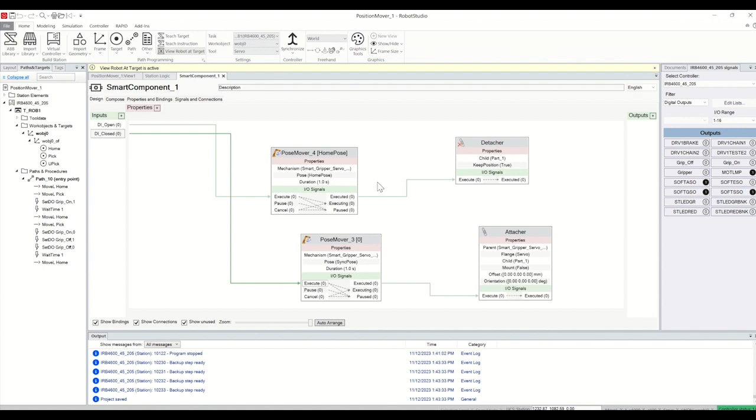I didn't use smart components before, but this time I'm going to use the PoseMover and do a similar thing. That is what I am targeting to do. If I just play it, we will see the robot come, pick, go there, place, and go back to the home position. So let's see how we can create the whole simulation in this video.

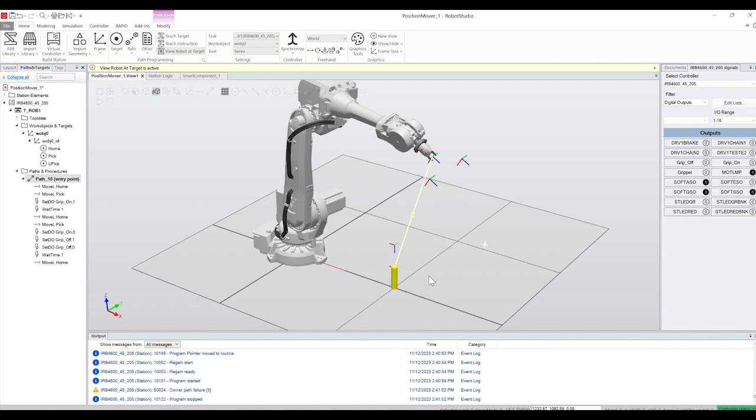To do this, I'm going to use IRB 4600_45_205. I'm using this one because the project is related to that robot, and I thought, why don't I use the same robot so that we can have some practice. This time I'm going to use a smart gripper. So let's put the gripper at the tip of the robot.

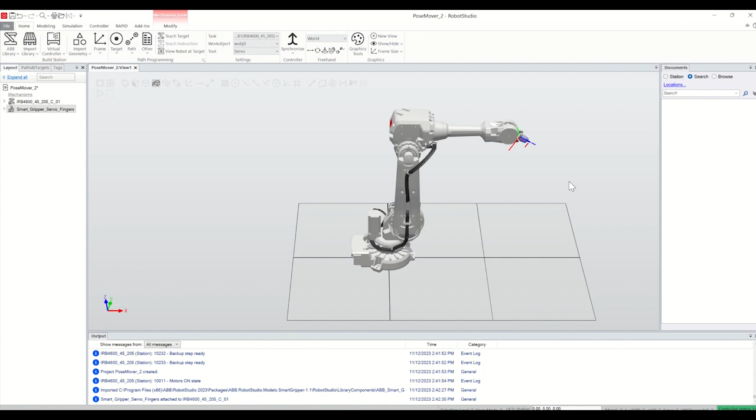As a picking object, I'm going to make a cylinder from the model. The radius will be 20, and the height 200. I'll make it at 0 0 position, then quickly move the position along the x-axis, maybe 1000, so that I know the object is here. And let's give it a color, maybe yellow or green. So we got the object.

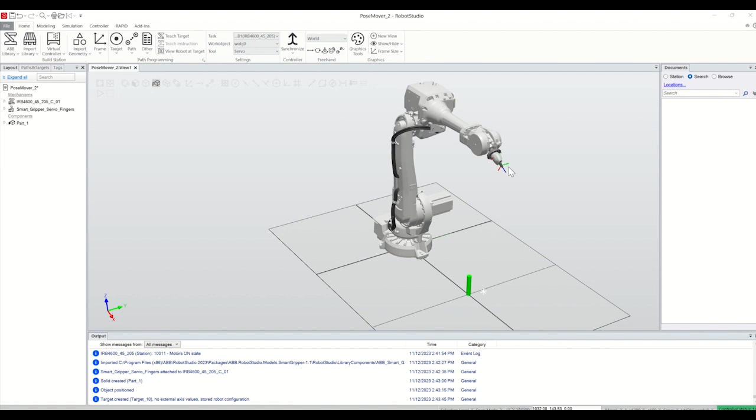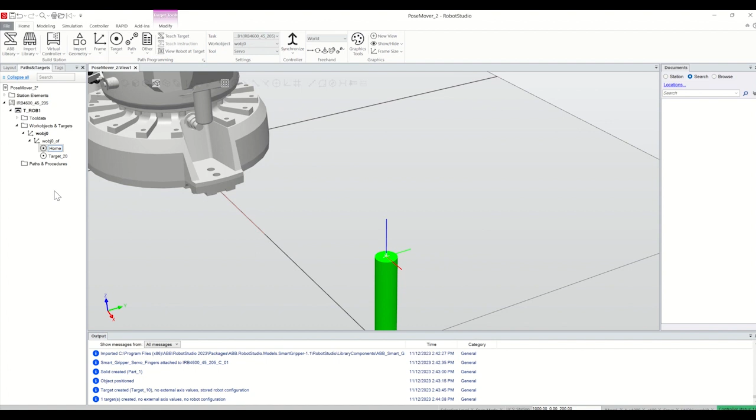Now the next step is to quickly make the targets for home and pick. I want to make one TCP, so let's take a teach target. I got one target in front, and let's make another one close to the top of the object. I want to make sure I'm selecting a grid and on top, then I can create one. Let's make this one home, and the other one my pick position. I know I would need to change the pick position.

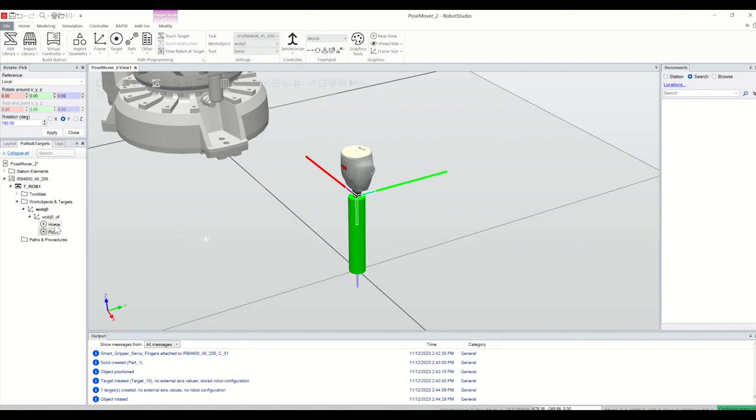I usually do 180 degrees along Y, and if needed, I can change others. If I want to see how it looks, it looks like this, and I can also bring the robot there. Then I want to make the toolpath and see if the robot moves from the home position to the pick position. I am seeing a preview of the tool path. Let's see if I can move along the path. It looks like the robot is moving along the path.

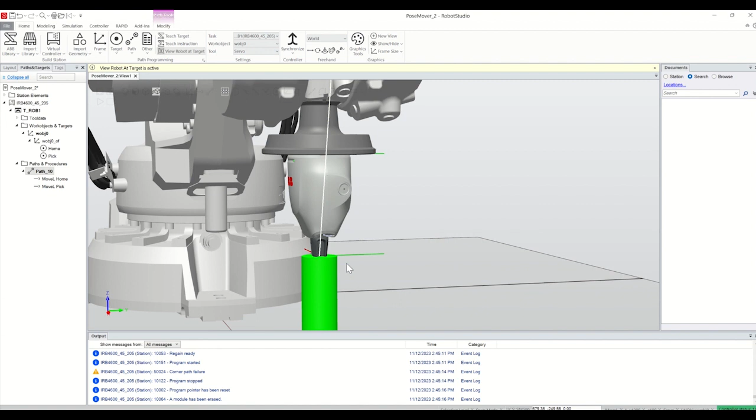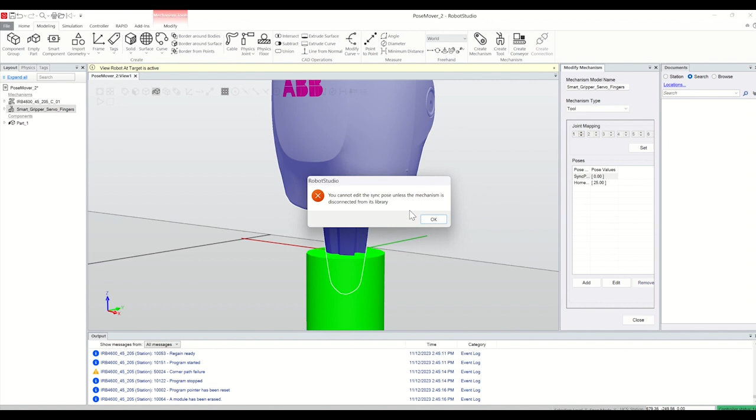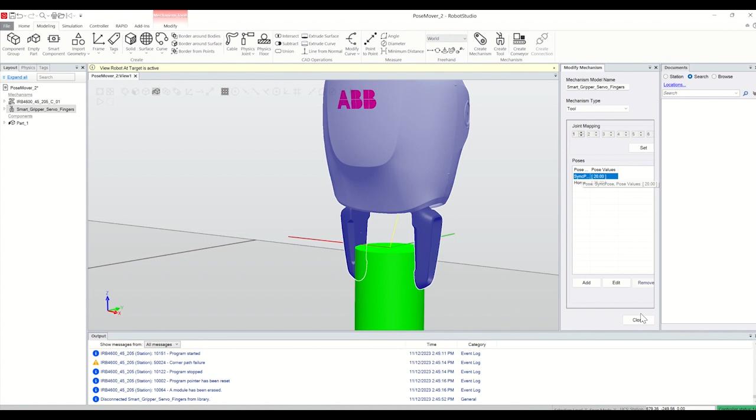Good. The next step is to make sure the gripper is opening its jaw and gripping. To do this, I need to go to the smart gripper and modify mechanism, the home. As you remember, I usually make it the maximum, and the sync. I need to disconnect the library, and since the radius of the object is 20, I can make it 20. So the home is opening and sync is closing.

Once I did this part, I would need to make a set of digital outputs. But before making the digital output, I can go under modeling, to smart components, and take a couple of smart components. One of them is PoseMover. I'm going to use two PoseMovers, one for sync and another for home. So I add one more, and it will show PoseMover 1 and 2.

If I close and again go to the properties, then smart gripper, and do the properties. If you are not seeing the pose options, you can close and go to the properties one more time from the PoseMover. Then you will see the sync pose and the home pose here. So smart sync pose, and the duration I'm using is 1 second.

For PoseMover 2, you will see smart mechanism. The pose is not here, so I can close and go one more time, and that's how we will see the home pose. And again, the duration is 1 second.

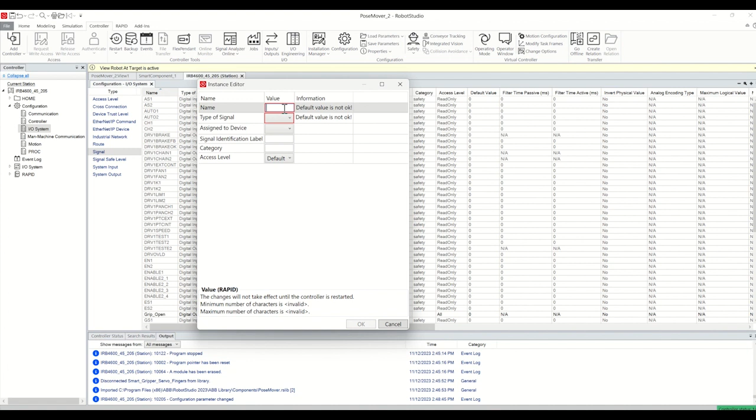And another, I'm going to create another, and that is grip close, and then type of signal I'm going to make digital output, access to all. So that's how I got total two digital outputs. Now let's quickly restart the controller, so that controller gets the information that new digital outputs are there.

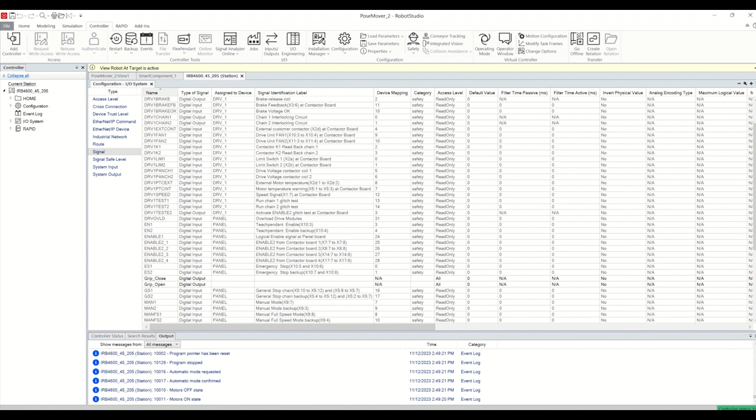Now once we got them, then under the smart component, we can go to design. We will see, okay, we got to pose mover. Then I would need to create two digital inputs for the smart component. One is maybe DI open, and display, maybe I can say gripper open, something like this, or okay, that's fine.

And another is digital input close, and this one is basically gripper close. So we got two. One is for open, another is for close. So what we can quickly do here, we can make a set of connections.

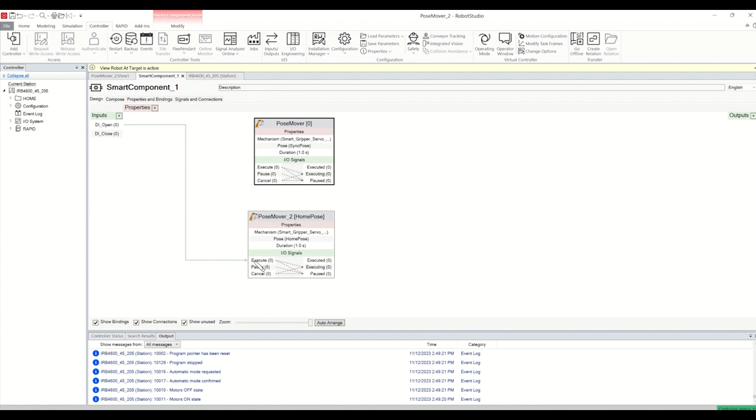The first one is if I go to the C, okay, I think we can do this way. For an example, DI open is for home, so I can say open, and DI close is for that one, right? So that's how we got them. You can create the connection from here, and sometimes I also like to create the same connection using signals and connections. So you will see we got two connections. Open is for home, and close is basically for the sync position.

Yes, as I mentioned, if you don't want to do it from the design tab, then you can also come here, and you can manually go and do it from here. So once we got that information, then under this smart component, I want to take two other components. One of them is the attacher, and another is the detacher.

So if I go to attacher and from there the properties, then smart gripper is going to grip, and the child is part one. I can apply, and for detacher, the child is part one. So apply. If you go to design, you will see they are here. I'm pretty sure attacher is somewhere. Yeah, it is here.

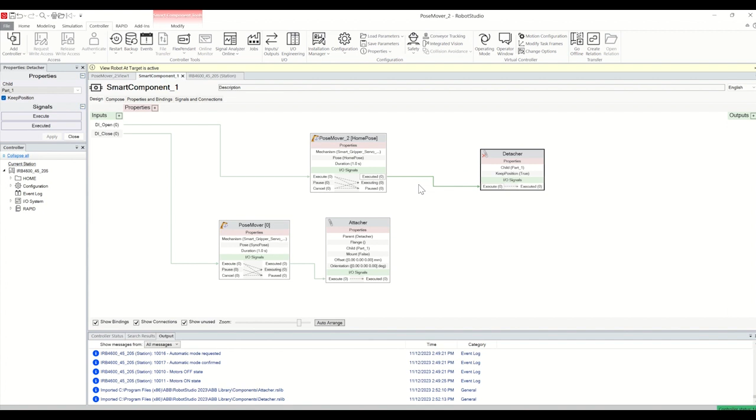And okay, so what does this mean? Basically, we got two inputs, digital input open and digital input close, and digital input open was connected to the smart component pose mover home and pose mover sync, and pose mover home and pose mover sync are connected to detacher and attacher. So if you go to design, another way you could do it, you could just simply use this pane and connect. As I mentioned, I can show a couple of different options. That's why I did it from the signals and connections.

So that's how we got that, but we need to do a little more operations from the station logic. Then I think we will be close to set. So if you see, the smart component got two inputs, DI open and DI close. We already created that, but under the controller, we have, if you can remember, two outputs. One is gripper open, another is gripper close.

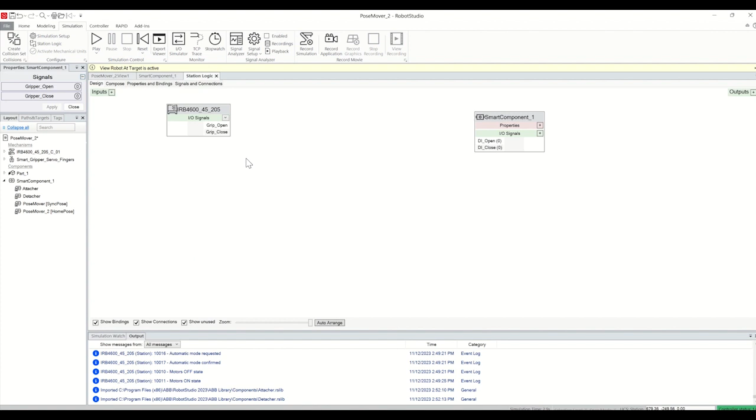So we got those two outputs, and if we want to make a quick connection, if you can remember, gripper open is basically going to do the digital input open, and gripper close is basically going to digital input close. That's how you can make this connection. Or again, if you want to do the connection from here, you can also do the similar type of connection.

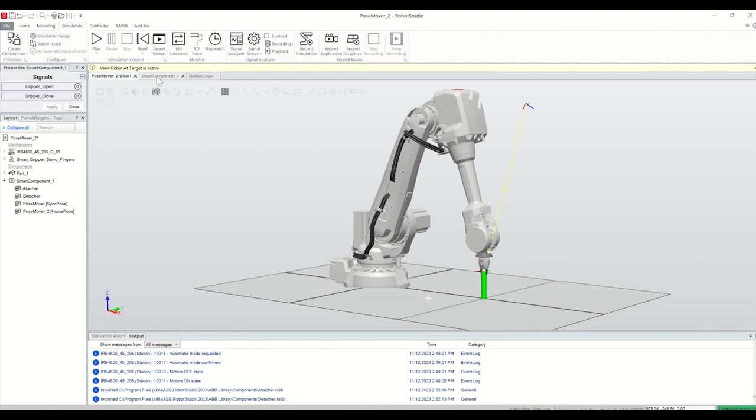So I hope I got most of the connections. The one thing we need to remember: if we go to station logic, then we will see a very small connection. But if you double click, then the smart component will open, and here you will see a couple of other connections and signals. And these concepts will be used hugely to do your project.

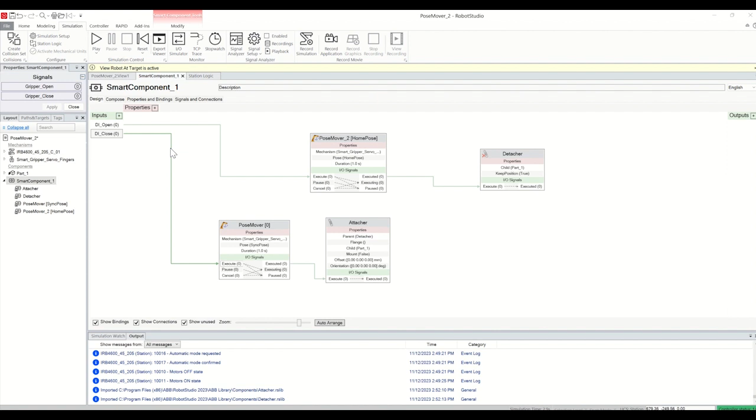So once we are done with all connections, signals, smart components, and that kind of thing, I can go back to the original window, and I can play with this toolpath to make sure whatever connection signals I created work. So here from insert action instruction, I'm going to make a lot of Set DO. One of them is gripper close 1, and another Set DO gripper close 0.

At the same time, I want to use Set DO, this time gripper open 1, and another Set DO gripper open with value 0. And I also want to use a 1 second wait time. So I got most of them. Now I need to arrange them properly, and then I can start playing those things.

So first things first, Set DO close should be right after the pick. After picking, it can wait 1 second, then it can go to home position. It can come back to pick, and then close 0, and then open 1, open 0. Maybe I can use one more wait time, and once these are done, the robot goes back to the home position.

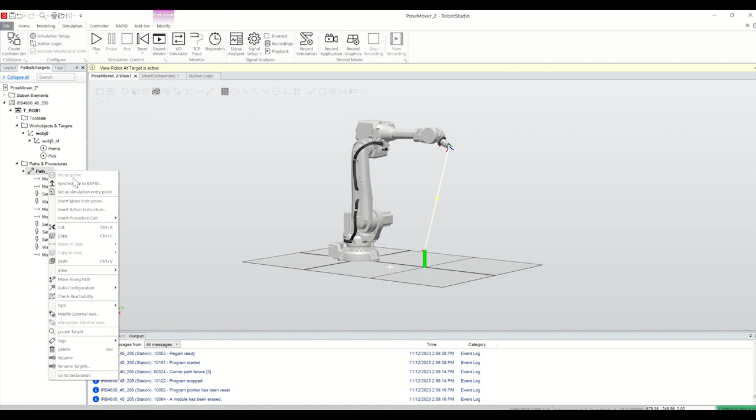Let's set it as simulation entry point and synchronize to RAPID. And once this one is done, we can try to play now. So let's play. Yeah, so the object was picked by the robot, and it went back to the home position.

After doing everything, if you play and see the gripper is not gripping the object, then you can go back quickly and check. Honestly, it happened to me even in this video. I didn't capture it, but I saw the parent got changed to something else. So if the robot is doing everything except attaching the object, quickly come back and see if this parent is getting changed. If it is, you need to use the right parent to make it work.

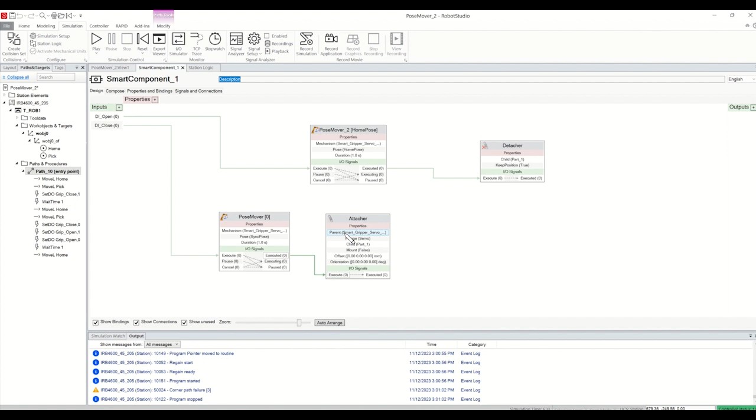It is working now. Maybe one more time quickly. So yeah, the robot is coming, picking, placing to the position and going back to home. Now I can quickly go to RAPID, and in the module I can see the code. I know we used that kind of language a couple of times. Now for example, if you want to do more here, I can quickly show one more MoveL, and this time bring it back, and everything is as it is.

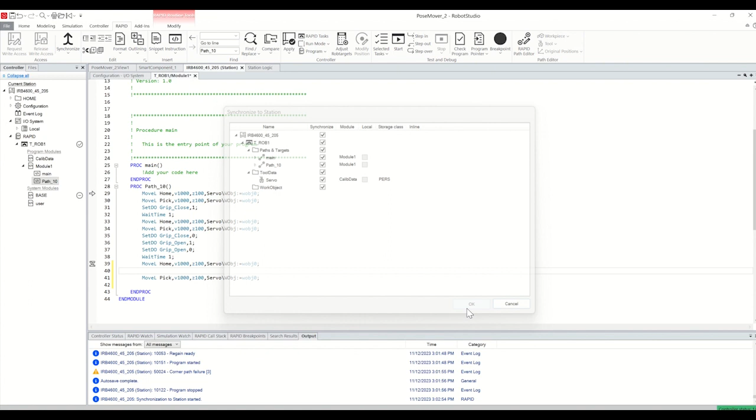I just made these changes in the code, and if I want to reflect that in the station, then from synchronize, I can do synchronize to station. Then I can click all of them. And if you go back, under the home you will see you got one pick position here. Now if you play, let's see the changes. It is picking, placing, it will go back to home and it should come back again to pick.

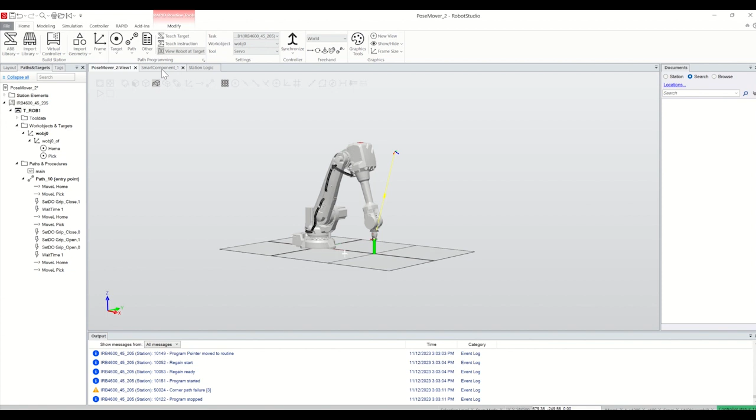So I just quickly showed how you can change this in the code, and if you want to reflect that in the station, you can do that just by synchronizing it to the station. So I hope this video will help you understand how we can use PoseMover and how we can integrate the station logic and the smart component together.